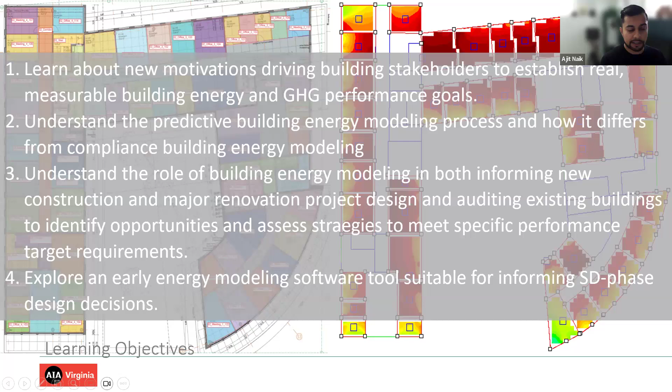We're going to today talk about energy modeling deciphered for architects, along with the virtual workshop. I have a few learning objectives that I'm hoping you'll understand: some of the motivations, especially with real energy and greenhouse gas performance goals that are starting to influence building projects; understanding the energy modeling process, and specifically the two different cases of when you actually want to predict your building's energy usage versus get it rated for a compliance process like permit or LEED; and understanding the role energy modeling can play in both new construction and major renovation projects.

And then finally, explore a tool. For those of you who attended the first week session, some of this may sound familiar, but I think it bears worth repeating for those who haven't.

Many of you may have seen this statistic, published also through the AIA, where buildings today globally account for more than 35% of global emissions. Now this figure fluctuates year to year, but it's always over 30%, sometimes over 40%.

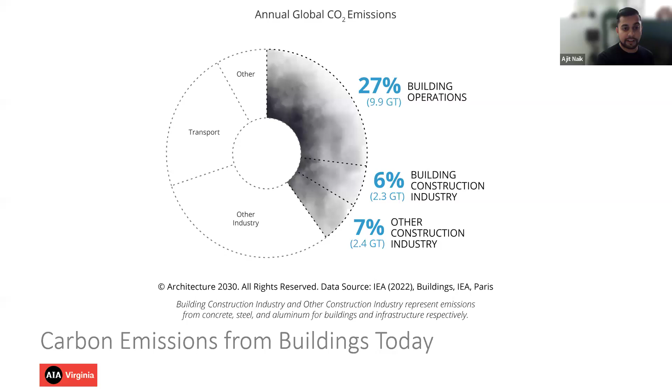So making a difference in building carbon emissions is one of the easiest ways to minimize our environmental impact. And people know this, right? So we've actually become more efficient with time. This is a plot from the U.S. government showing energy intensity by fuels in commercial buildings specifically, normalized by area.

We can see that for gas and electricity combined, from 1979 all the way down to today, we've gone from an average of about 118 down to maybe about 70. That's a fairly sizable chunk. We reduced our energy usage of buildings, all buildings, totally by almost close to 50%. So it's had an impact.

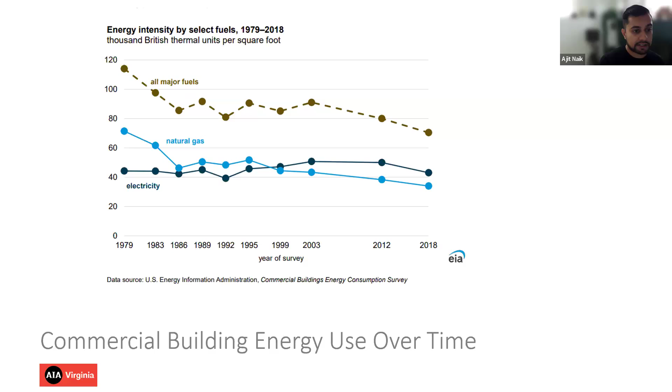And we see this, right? If we look at total US energy consumption, everything, buildings, cars, transit, factories, all in, we can really see that since the 1970s we've kind of started to flatline a little bit.

That's when building energy efficiency improvement happened, we had the oil crisis in the late 70s. Things got very expensive. There was a major motivation to reduce our energy demand, so that consumers wouldn't be faced with high prices, and we could have a stable country, and so forth.

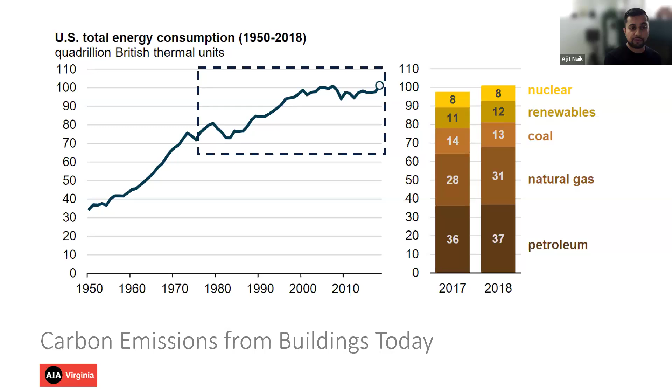So we really see that impact. The efforts in the 70s to improve energy usage and energy efficiency and minimize environmental impact have really paid off. And one of the ways that we did this specifically with buildings is building energy codes, one of my favorite subjects, a pretty dry topic, but one that I'm fascinated with.

And we see that in real world building data. Buildings on average have reduced about 40% of their energy relative to 1979. Building energy codes really explain that, because new construction and major renovations have to comply with these standards, and they're a lot more stringent than what they were. So it's a good thing and an example of a success.

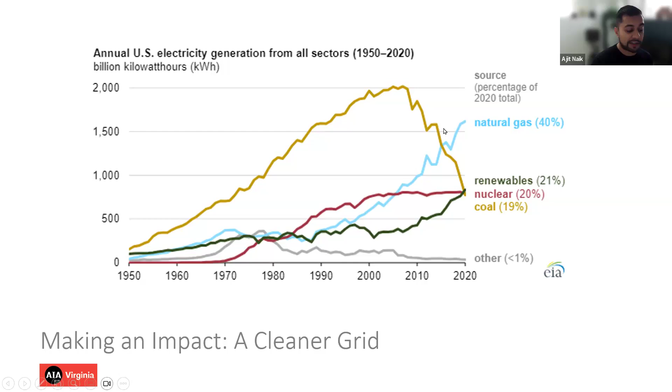But both of these things combined create the picture that we see in terms of forecasting carbon. So right around the same time as we made that switch away from coal towards natural gas and renewables started to ramp up, our carbon emissions have started to drop.

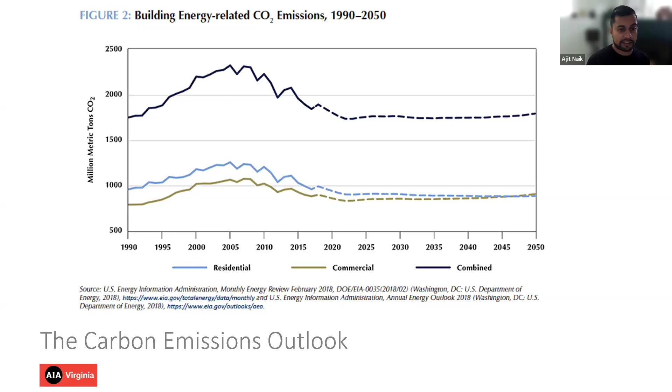But despite that, the EIA, which has access to all of the historical data and is plugged into future trends in policy, despite these increasingly efficient energy codes and our increasingly clean grid, we see that our carbon emissions actually start to flatline. We're dropping, but over the next 20, 30 years we kind of stay static. And again, these are building related energy carbon dioxide emissions. And why is that?

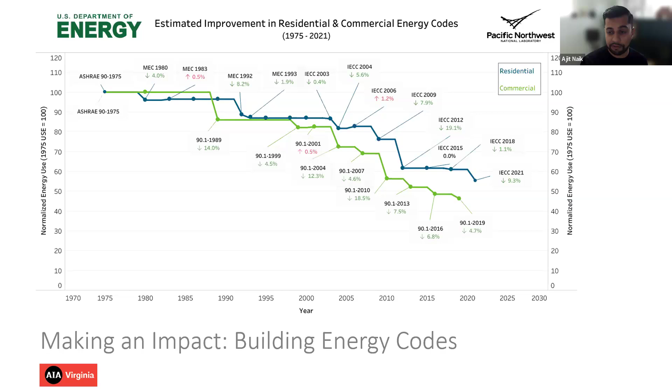Only 20% better than when we started out in 1975, not all the way to 55% better than we are now. So really, most of these buildings were built in a time before we had serious energy codes, or before a time we had energy codes at all.

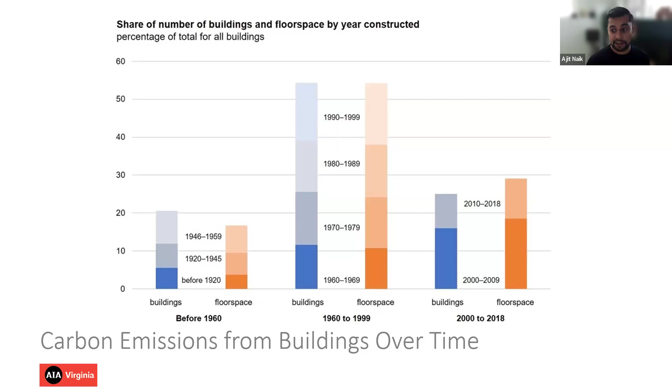And many of these buildings may not have been renovated. They may not actually be subject to any of these codes. The most recent estimate I could find is that by 2040, two-thirds of the global building stock will still be existing buildings, not captured by these increasingly modern energy codes.

So what do we do about it? One way that municipalities have responded to this crisis of carbon emissions from existing buildings is benchmarking ordinances. They exist in cities all over the country. Many cities, mayors, and governors have signed President Biden's building performance standard pledge, which involves benchmarking buildings.

So this is something we see increasing. I believe DC has been doing this since 2013, if I recall correctly. There's an increasing number of buildings each year covered by this. At the outset, it was only 50,000 square foot buildings and higher, but as time advances, next year it's going to be buildings as small as 10,000 square feet that have to report their energy usage and have it verified by a third party.

Making people pay attention and report this, and making that data publicly available so people can see where they stand — that's one of the first ways you motivate existing building owners to improve. Some of you may have a utility company that sends a report comparing your home energy performance to your neighbor's. Mine does, and when I'm double the amount of my neighbors, I'm wondering what's happening. So that's the first step to addressing existing buildings.

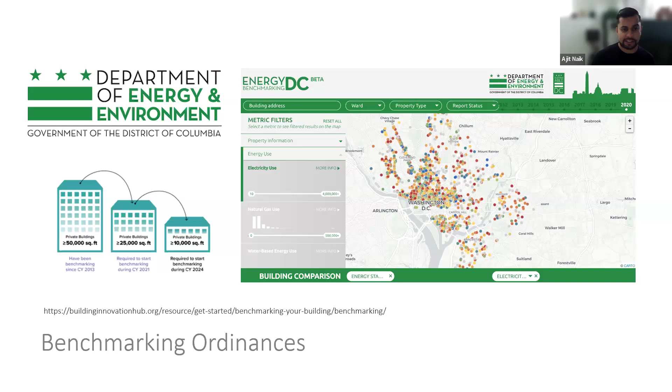Next, there's also a stick. Some municipalities, for example my home, Chicago, where I'm calling from right now, give you an energy rating. So does New York — it looks just like the ones given to restaurants in New York. Based on the energy performance you report each year and how you stack up with your peers in your municipality, they give you a sticker you have to post in the front of your building, and you're kind of named and shamed. There are many shameless people out there, building owners included.

Some municipalities are going even further, to put up a building performance standard. A building performance standard is a type of law built on benchmarking — when you report your energy usage, not only do you get named and shamed, but if you're below average, you actually get a fine. So if all the office buildings in DC are operating at a certain energy usage intensity and you're using more than that, you face a fine, and it can be pretty significant, on a rolling basis.

Let's look at what some of those standards are. In DC, for an office building, you have to be, on average nationwide, more efficient than 71% of peer facilities. So in DC the average office building is already better than 71% of offices nationwide. To be in compliance with BEPS, you have to be even better than that — in the 72nd percentile or higher.

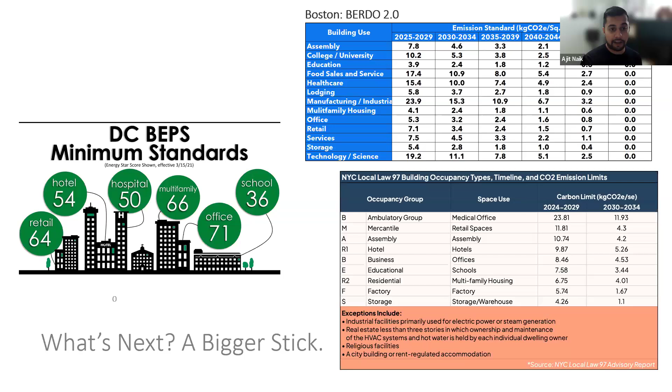What are these penalties? They're quite significant — sorry, the screen is a little small — but in Boston we're hitting fines of up to $400,000 by 2050. In DC right now, the first round of penalties is dropping next year, at $10 a square foot, capped at $7.5 million as a maximum fine. Those repeat every 5 years for buildings that continue to not be in compliance.

I couldn't find a clean summary of New York's fine structure, though I did find this news article describing the potential fines faced by Trump-owned properties.

These fines are all in the hundreds of thousands of dollars. They make a real difference as to whether or not you even retain a building if you can't afford to renovate it. These standards aren't everywhere, but they are in large jurisdictions around the country. Washington State has one, and quixotically, St. Louis has one. We anticipate seeing these grow more and more, impacting projects that all of us work on. So you need to deal with the energy code to get a permit or certification, and you really are going to need to deal with your actual energy performance post occupancy, or you're going to start facing these fines in higher tier markets.

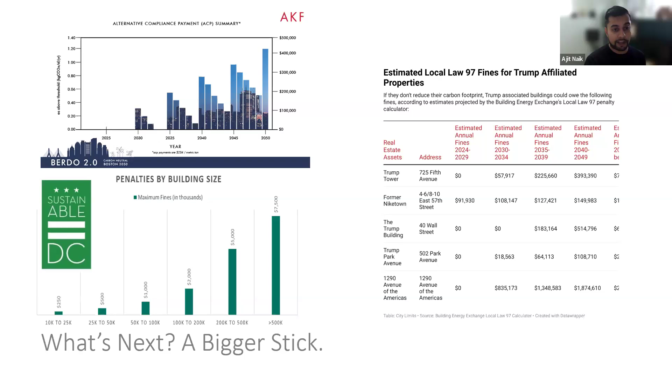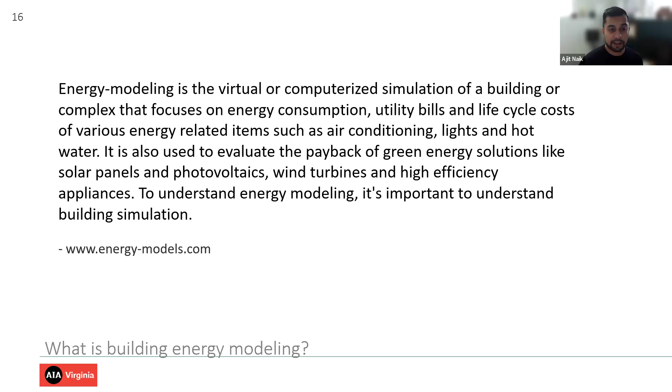So what do we do about it? This is where energy modeling comes in. Energy modeling, for those who are unaware, is basically a computer simulation focused on predicting how much energy your building uses. It's a type of building simulation. Building performance simulation is that writ large, using a computer-based model to predict anything about a building, as long as that model is based in fundamental physics principles.

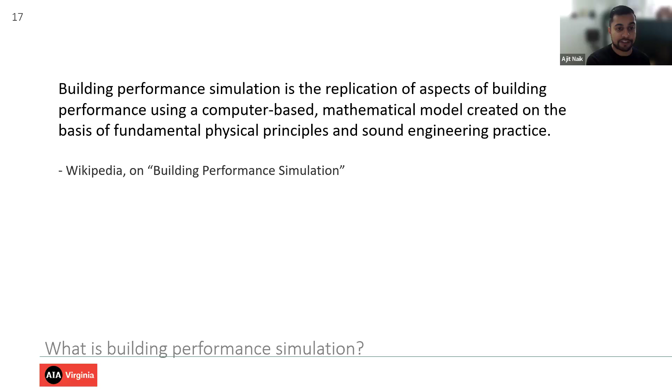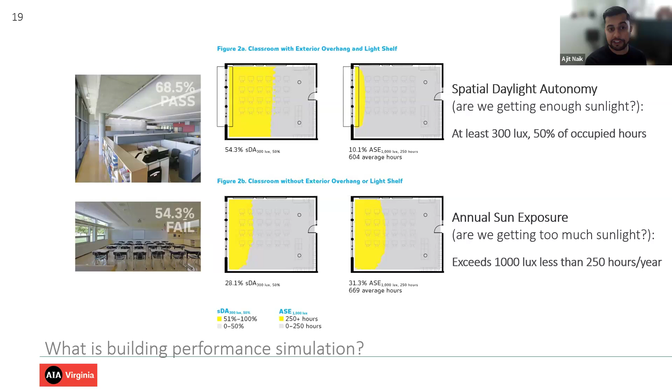There's lots of different kinds of building performance simulation, and all of them are intended to provide feedback and influence design. Some of you may be familiar with renders and daylight visualizations, quantifying how much usable light you have within a space and selecting finishes and openings to optimize that daylight. There's also embodied carbon analyses, where you can plug into a Revit model and compute how much embodied carbon went into your construction materials. There's also CFD, computational fluid dynamics, airflow modeling, where you can predict the pattern of airflows throughout a space for mechanical ventilation, or optimizing your facade for natural ventilation.

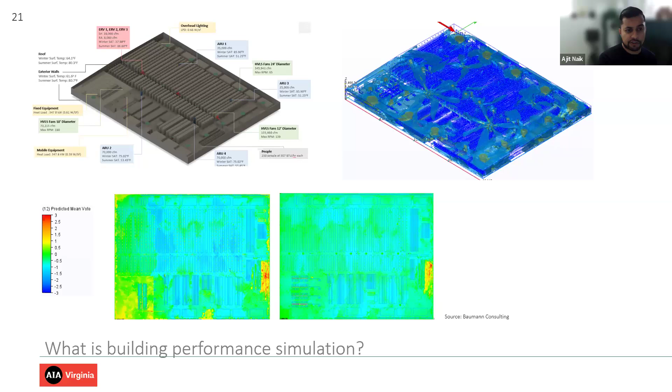So energy modeling is just one of a whole suite of building performance simulation techniques, and they all feed into each other. If you do a daylight analysis that optimizes your windows to minimize the amount of light you're using, or if you use a CFD analysis to optimize your natural ventilation so you can turn off the HVAC system more often, all of those things get accounted for in your energy model.

So an energy model at its base is you draw the building, define it. It's usually not quite as good looking as it is in your render. It's usually simplified, a little bit ugly, but representative of the building for the purposes of modeling fidelity. You define inputs like weather, typically using a 30-year average weather data to get a representative condition. You define the enclosure in terms of thermal properties, the occupancy, how often they're in there, the plugged-in appliances, the lighting power, the HVAC, the water heating, even down to the utility rates.

Basically, you can think about the energy model as somebody building a virtual copy of what's shown on your plans and your design. And you get a lot of useful things out of the energy model. You get your energy use, your peak energy loads, like how much rate of electricity you demand at the peak of summer. You get your utility cost. You also get carbon emissions out of here. Plenty of very, very useful design feedback.

So really, anytime you're working on a set from concept to SD and onwards, and you're sending something out for a cost estimate, if you're not also getting feedback from your energy consultant and there are energy goals on the project, that's a red flag. It's just as important when you send the check set to the cost estimator that you send that information to the energy consultant so they can provide all this valuable feedback. And you understand what kind of impact on your energy performance, your carbon emissions, your project goals, potential future penalties you really are incurring by selecting that VE option after all.

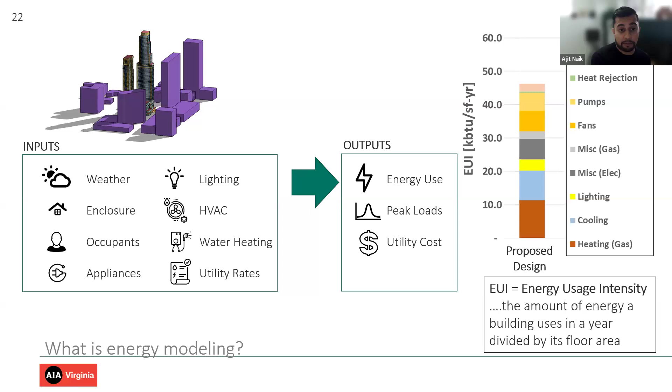If I have a medium office and another office 50% larger, it's not super useful to compare their energy usage directly. But if I divide it by floor area, I get a good idea of which one is using more on a per square foot basis. Just like we measure construction costs in dollars per square foot, we measure energy use in energy use per square foot.

Where is building energy modeling most often required? Where we started today, energy codes, right? Energy codes are a big one.

For those who have worked on a Virginia DEB project, you know you have to document compliance with the 2021 VECC. If you're working in Arlington County on a private development seeking a FAR bonus or density increase, you have to comply with Administrative Regulation 4.1, which explicitly requires you to run an early phase energy model and show how you incorporated it. So that's the first step, to get permission.

Regulations require energy modeling. Where else? LEED. I'm sure a few folks here have worked on LEED projects, whether new construction or existing buildings, and most LEED projects require an energy model as well. Not all—there's definitely ways around it—but most LEED projects, especially new construction and major renovations outside of tenant fit-outs, require an energy model.

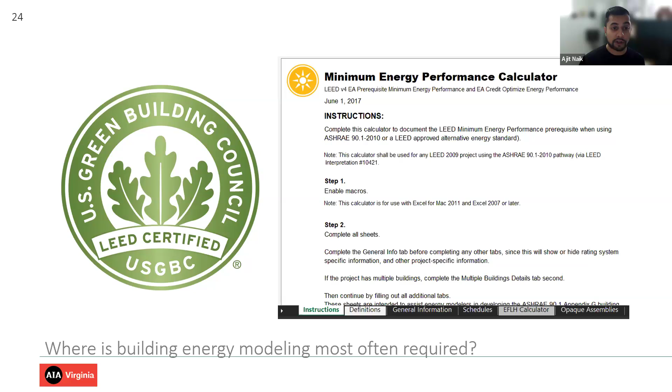That's also true of other certification programs—Green Globes, Energy Star, multifamily new construction high rise, which is required for Virginia Housing Authority projects. All of them require some kind of energy model.

The third main reason is incentives, right? There's specifically an incentive called Section 179D of the US Federal Tax Code. That allows you to get a tax deduction for designing efficient new construction or renovating existing buildings with efficient technologies. If you comply with prevailing wage requirements, it's over $5 a square foot you can claim. So if you don't, you're just leaving money on the table.

It's important to note that even nonprofits and governments that can't claim tax deductions because they're non-taxable entities can still benefit by passing through the tax deduction to the design team. So if you're an architect working on a federal project, it's always a good question to ask: can we take advantage of this, especially if you're already doing an energy model?

So those are really the three main reasons, motivators for energy modeling. There's regulations to get a permit or zoning approval. There's certifications, third party, which maybe you just want, or maybe they're required as part of that zoning approval. And lastly, there's incentives. There's many other reasons to energy model, but compliance is what all of those things share in common.

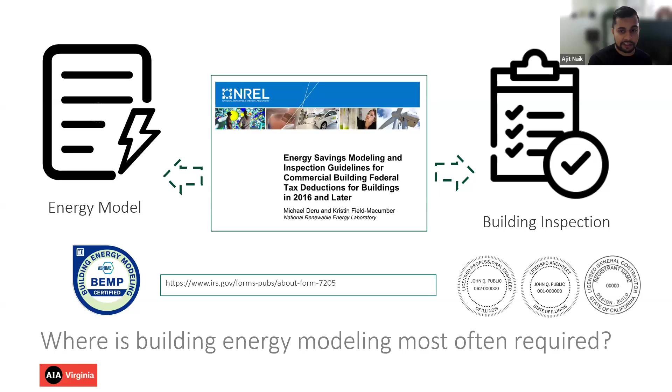Funny enough, the way compliance modeling works is you actually create two building models. You create a model of your building, exactly as you're designing it at that point. And you create a second model of an imaginary, fictitious baseline building. It's shaped like yours, zoned like yours, has the same program as yours, but everything else about it is code minimum—code minimum efficiency HVAC equipment, code minimum efficiency lighting, code minimum envelope, all that jazz. You just have to prove that your model beats that imaginary fictive baseline.

None of these things—the incentive programs, LEED, energy code—are based on accurately predicting how much energy you use, but on making sure you beat this reference baseline building. It's all relative. Sounds kind of shocking, right? Shouldn't energy modeling be about accurately predicting your building energy usage? But no, it makes sense if you think about it.

It's really similar to the EPA rating cars' mileage efficiency, which also started in the 70s. All cars, when you go to the dealer, get that little sticker that says 28 mpg, city 32 highway, whatever it is. I have been driving since I was 16, and I have never once in my life gotten the mileage shown on the vehicle, because I've got a lead foot, I live in a cold climate, there's many factors that lead to that.

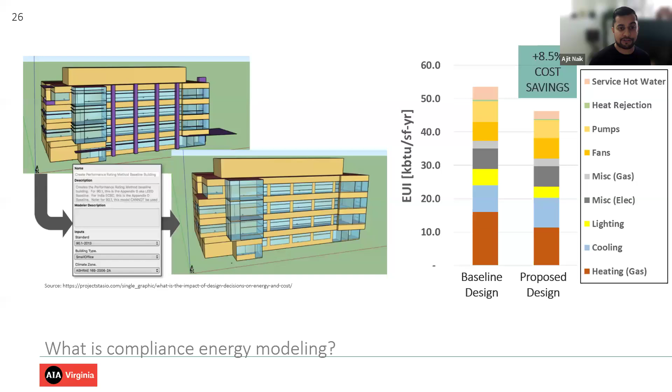It's really about performance rating.

This differs from performance modeling. Let's say you own a building in DC, you're subject to BEPS, and you just realize you've got a $3 million fine coming up. And that's based on your utility bills. That's not based on any kind of fictional baseline building relative performance. It's based on your utility bills.

So this is where performance modeling comes in. It's a form of modeling, same type of build, you build the same building energy model, but you're intending to use it to actually predict real world building use. So you need to do a much better job defining all of your simulation inputs, making sure they use real world aspects of the building.

A really good example is schools. When you're energy modeling a school, it'll use a stock default school schedule in the software. But it's always worth going and looking at the academic calendar of your school district, understanding when the holidays are, when spring break is, when summer break is. That information is usually available to you.

And while you might not need that for a compliance project, where you're just comparing to your baseline, it may not be required, but it definitely is required if you're trying to accurately predict how much energy your building is going to use. There will always be things that are uncertain.

Like, keeping with schools as an example, for new schools - maybe university is a better idea - sometimes there's staged occupancy, where only some of the faculty move in, labs take a couple of years to move in. We're not sure how that's going to look.

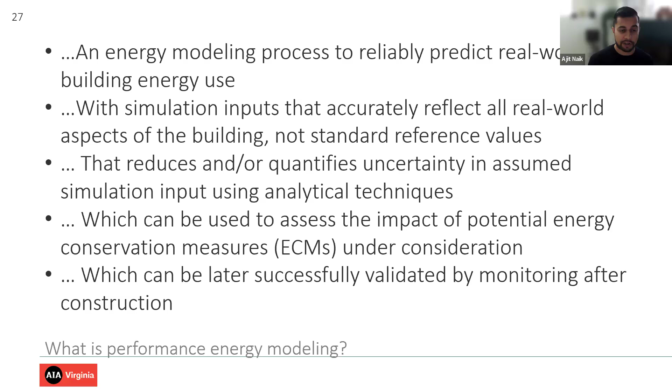You need this kind of predictive performance model that isn't just about compliance. So you can't always just look at your LEED energy model or your permit energy model and say, oh, that's how much energy we're going to use. It really doesn't work like that. You need to use performance modeling for that.

Just a quick summary: compliance is again just about comparing and rating you compared to a typical building. Whereas performance modeling is really about trying to make sure you have a specific outcome.

So if a client is a university who's going to set a utility budget based on your energy model, or the client is a building owner in a place with a building performance standard that's really worried about fines, or somebody's trying to design a net zero building that has to use zero energy when you include the renewable energy on the roof - all these cases, wherever you have a measurable specific energy or carbon performance goal, those are always signs that you need to do a bit of a heavier lift.

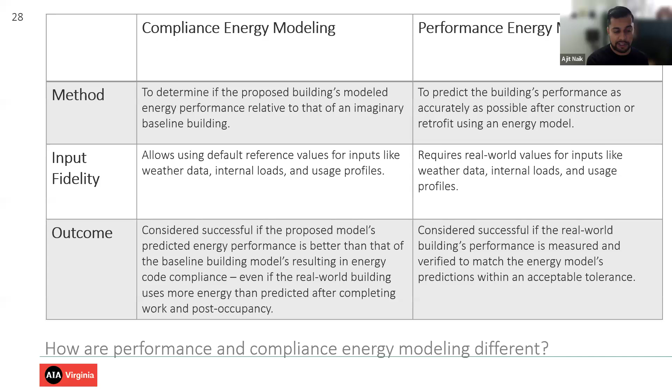So I want to talk briefly on two scenarios, how this can help existing building owners. The easiest way is existing buildings have the value of having real data. Everybody has utility bills if you're operating a building, and it's really helpful because you can then calibrate your model to the utility bills.

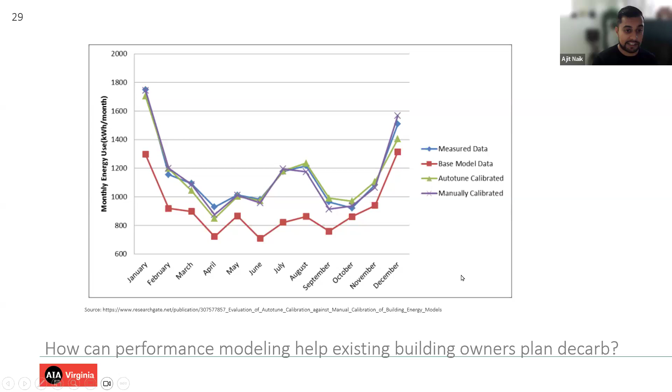You do the best job you can, and maybe you're a little bit off, as shown in this first kind of step here. But with some effort and tweaking of your inputs, getting back out to the building, maybe refining some things that you missed, you're able to get a much better match. And once you calibrate an energy model to existing data, it's really, really useful for making decisions.

What about building developers? A lot of us work in new construction, me too, and a lot of those, we don't have those options. There's no existing building to double check, there are no utility bills to calibrate against. There's only the things that we know are going to go in the design, and the things that we're uncertain about, like the weather or occupancy. And those things impact design decisions differently.

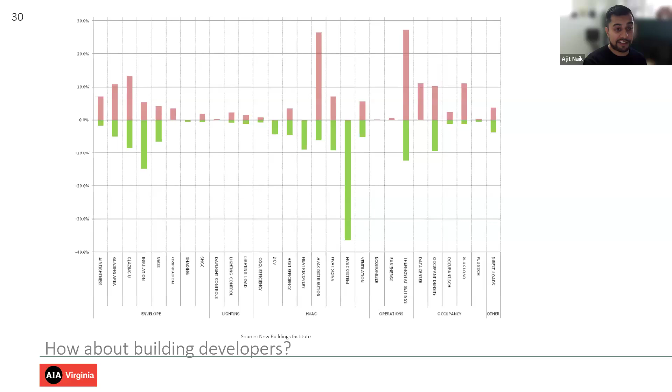It's pretty easy to add a floor to a community center in early concept design, but try telling the PM that at 50% CD—like that's not even the same project anymore. So it's really useful to energy model early so that at the same point as you're evaluating early design decisions based on preliminary cost estimates, you also understand what they're doing to your energy performance.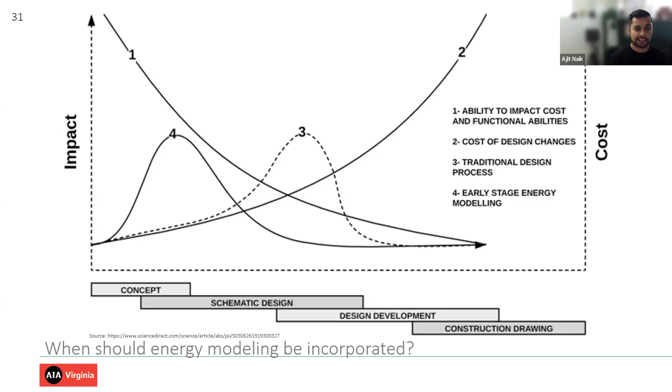And not just what you need for permit, not just what you need for a certification, but maybe also what you need for incentives. And if you're working in a jurisdiction with a benchmarking regulation, maybe even in terms of how you perform relative to the existing building stock. By the time you get construction drawings, it's very difficult to course correct and change things—at that point you're really just using energy modeling to validate the decisions you made earlier on.

This is an example we worked on in Virginia, the Brock Environmental Center, about 12 years ago. I mentioned this project on the first workshop, but I wanted to share some slides. This is a really high performance building in Virginia Beach, small, an environmental center. If some of you may have visited it, if not, it's a beautiful facility and site—I highly recommend you check it out next time you're in the Bay. It has the whole gamut of sustainable design features: great envelope, on-site renewables, high efficiency, everything.

But still, energy modeling was essential here, for cost savings. Everybody knew at the outset this building was going to be designed to be net zero, and that we had to pull out all the stops to make it happen. So one way or the other, it was going to happen, but that doesn't mean all of those things cost the same. Since we knew we had to get to net zero, photovoltaics were going to be necessary.

You can't use no energy at all—you minimize it as much as you can and then make up the rest with solar or wind or what have you. So if it's a sunk cost that you're going to have to buy solar anyway, you might as well start thinking about, well, what if I buy more efficient building components?

Is the delta between picking what I was going to and getting that slightly more efficient system, how does that trade off against photovoltaics? As we all know, things like wall thickness, roof thickness, impact program area, impact structural requirements. So a lot of this stuff needs to get sorted out fairly early in design.

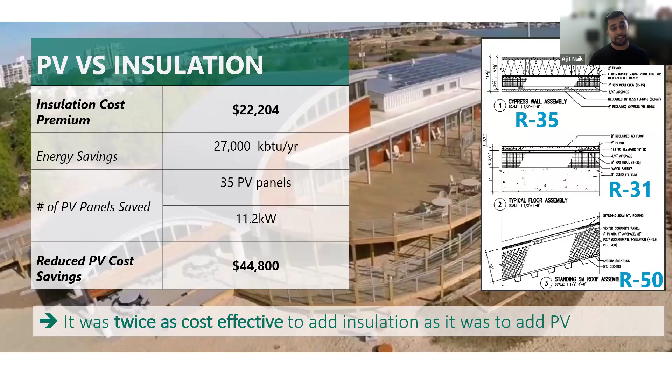Roof insulation was a great example. We noted that for this small building, using 2013 pre-COVID pricing, adding just a couple more inches of insulation added $22,000 to the building costs. Photovoltaics were also more expensive at the time, but that insulation savings was equivalent to the production from 35 PV panels, costing $44K. So it was actually twice as expensive to implement photovoltaics as it was to do insulation.

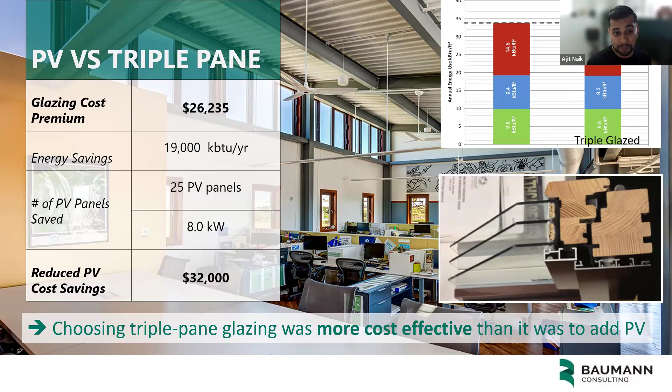Same thing with the glazing, triple pane glazing. It wasn't quite as dramatic, but it was still cheaper to bump up from double to triple pane glazing than to buy that same amount of generation in photovoltaics. So the decision to include triple pane or add 3 inches of insulation to your roof, that's only something that can really happen early in design. I've never seen a change like that happen in CD, not even really in DD, maybe early DD, but it doesn't happen too often.

So energy modeling is a great tool, a necessary tool, important, especially to use it early. This is where you all come in as architects, whether you're doing this in-house, which can be possible, or whether you work with a consultant. It's really critical on any project that has energy-related goals.

There are several references you can use. There's lots of ASHRAE standards. AIA put out a standard called Integrating Energy Modeling into the Design Process. Rocky Mountain Institute has a good one. There's some forums on Unmet Hours, energymodels.com, which are great resources for the community to come and answer questions that they might have.

If you're looking for a good energy consultant, a good energy consultant is somebody who knows the project details, answers hard questions, knows the codes and the rating systems, works quickly, knows the software, meets quality requirements, communicates, and you just feel like you trust them.

Somebody who's really good understands the bigger picture, not just focused on energy, but understands the entire design and construction process. They ask the questions, they're a bit of a troublemaker, they suggest things that you might have to react to. They're an active part of the team, actually at the design meetings, not somebody who you email and hear back from 4 weeks later.

They have proficiency with multiple tools and can select the right tool for the job. They understand what level of accuracy is required at what phase. When something is just a sketch on paper, many things are unknown, so you don't need to develop the same amount of time, effort, and complexity as you do later in design. And they really kind of inspire the team to be better.

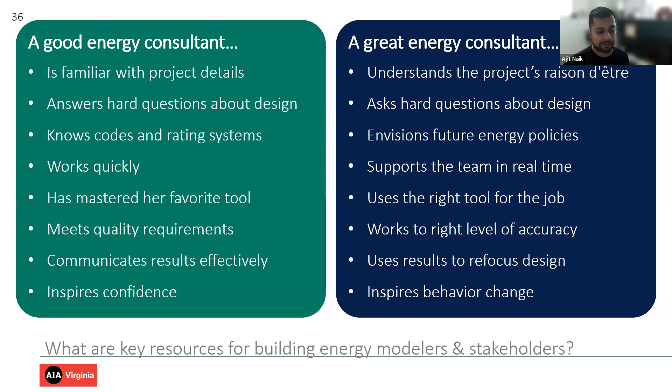Again, there are lots of tools out there. IBPSA, the International Building Performance Simulation Association, publishes a database of tools available, and there's many, many of them. I'd just like to point out Energy Plus is a really common one, developed by the United States DOE. It's like a text-based DOS type engine, but it's a back-end thing that people build lots of front ends for, like Open Studio, Design Builder, and the US government has its own free tools. They all kind of run this in the back end.

eQuest is another common engine that's used in the same way and is running in the back of the software we'll explore today.

Coming back to early phase opportunity, the software we're going to use is called Sketchbox. I dropped the link in the chat, so please make sure to register for an account if you'd like to follow along. It was developed by a company called Slipstream. The gentleman, Ben Heymer, runs the software development team over there. They are a big engineering company, like Resource Innovations or Willdan, that runs utility incentive programs, and they run a utility incentive program here in Illinois for energy efficiency.

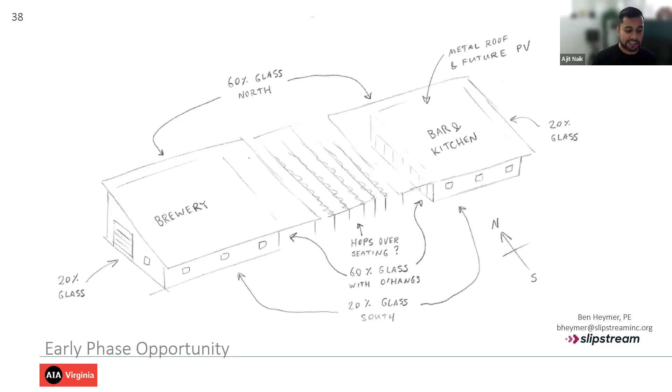They noted that a lot of these decisions that make an impact have to be decided in the early stage, when you're still kind of in a hand sketch, and just created a program to incentivize it. So I really was looking for the early phase opportunity. These big, detailed, complex models that people build for LEED can take hundreds of hours.

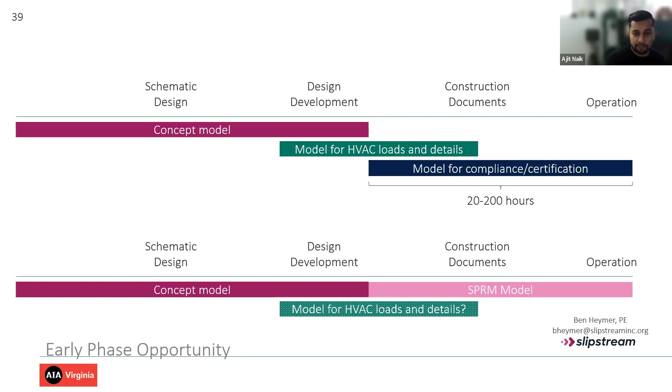The opportunity all lies in here. So you really need a tool for that concept and planning phase, and you need something that's simple, easy to use, provides fast feedback, allows you to test lots of options, many different changes, and work quickly.

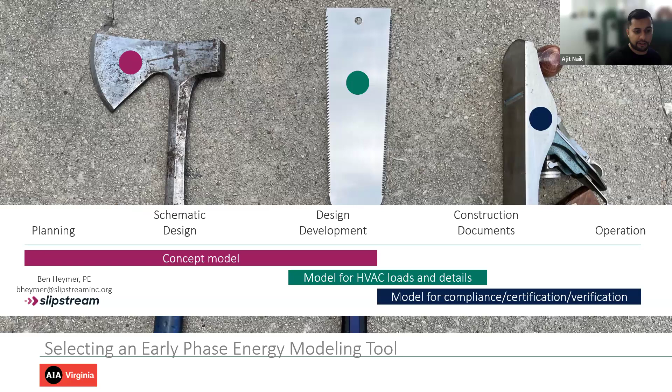Sketchbox is certainly not the only tool out there. Some of you may be familiar with Cove tool, which was discussed at the last session, or Sefaira, or Climate Consultant for the old heads out there. There are many different front ends for the newer folks, like Ladybug tools on Rhino. There are lots of different tools out there specifically designed for early phase analysis, and this is just one of them. So if you haven't already, please go ahead and hit that login page at the bottom, sketchbox.io, and create an account, and we'll be going through there today.

One of the reasons I selected this, and not because I know Ben, but because it's very accessible. Lots of times, early energy modeling software is kept behind high pricing, and one thing I like about Sketchbox is it's really cheap. There is a basic model, which we'll use today, which is pretty limited in terms of your geometry, but the standard fee is only $149 a year. So I think it's not too expensive, relatively speaking.

So we'll distribute the slides after this again, and we have a little bit more content after this slide, providing some guidance, but we'll actually walk through a demo right now. Before I get started on that, I wanted to pause and see if there were any questions that have come through on the QA.

We did have one. This is from an anonymous person inquiring about the pricing in PV, which has come down significantly since the Brock Center project. With that math, is that still applicable to today's economy? I really doubt that ratio is the same, right? This was done in 2013 when there was still the business energy investment tax credit for solar, and that calculation doesn't include that since you don't get it till after construction. It might not be the same amount of insulation, it might not be the same amount of PV, but the point is you have to do the assessment, right? That'll vary project site to project site.

So once you define your location, your costs, your specific operating conditions, you get to design your building. You'll start out with just a square.

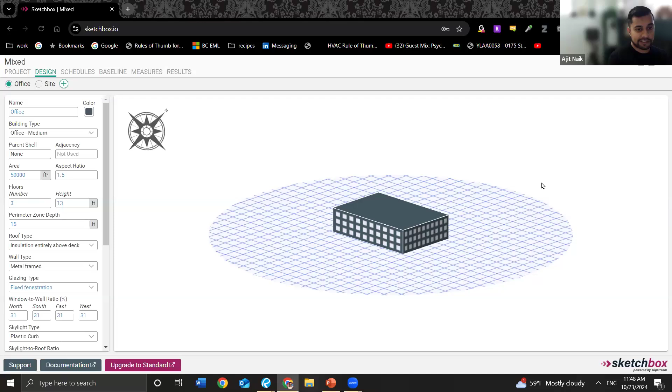One of the limitations with Sketchbox, and generally with early energy modeling software in different ways, is representation of the building. Cove tool, you put in a Revit model and it just calculates your area and doesn't really use the building geometry. Sketchbox does let you use building geometry, but limits you to how you create it. You can only create shapes of typical sizes.

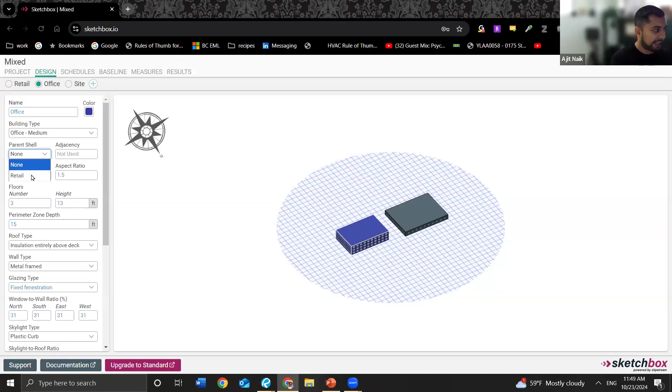So if we look, you can add another shell. Let's just say our first floor is going to be retail, like a non-mall setting, as the first floor. We can add another shell to it. It'll create another box. We can select the retail as the parent shell. We'll say that it's going to be on top of it.

We're going to say that it's 8 floors, and it's 50,000 square foot. Let's make it a little bit bigger so it has a better aspect ratio. Let's call it 100,000 square foot. And it gives you a fair approximation of the building.

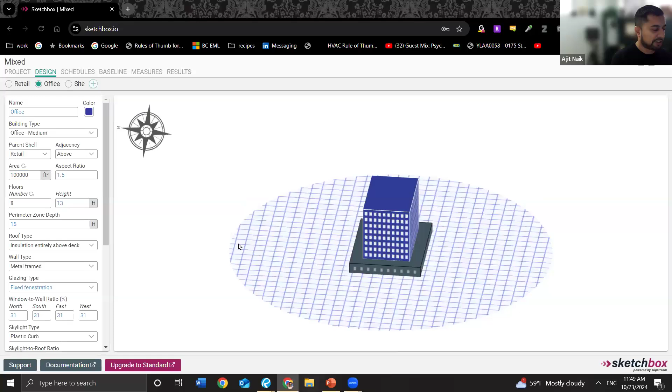So if you have a curved building, or an L-shaped building, or anything else, you can try to approximate it using these basic block shapes and the adjacency. So if it was maybe more of an L shape, I could have it based on the north. But let's go for now with assuming it's kind of a stacked mixed-use tower with street-level retail and office up above. So let's start with the office.

With the roof type, it's insulation above deck, typical metal deck with, say, polyiso up above it, typical steel frame construction. Fixed glazing, you can define different window to wall ratios. Let's say we're a little bit glassier here, going up to 40%. And it'll actually make that change directly in the software.

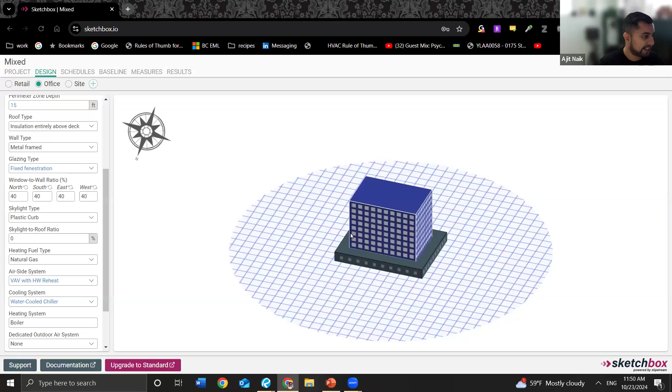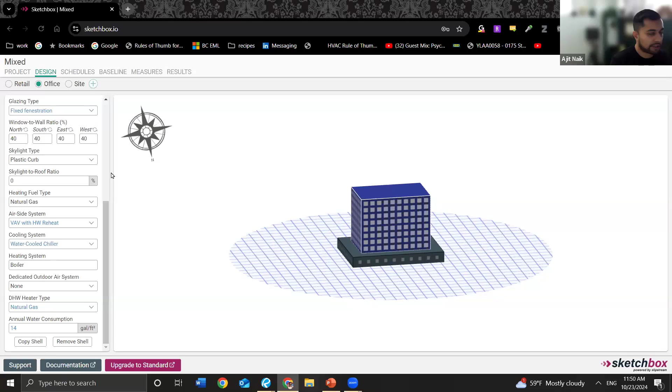And you'll see if we went down to like 10%, it makes those windows real small. So while it's not a beautiful representation, it's a reasonable one. You can define skylights. You can pick your fuel source, gas or electricity. You can pick different common HVAC system types that you see. And it gives you defaults for the service water consumption based on your building type. So pretty basic, but just defining your enclosure, your lighting, your building design.

Next, we proceed on to schedules. They actually have tons of default schedules here. So we're looking at the office, we can also do it for the retail. They each work separately. So it'll pull open a typical occupancy schedule.

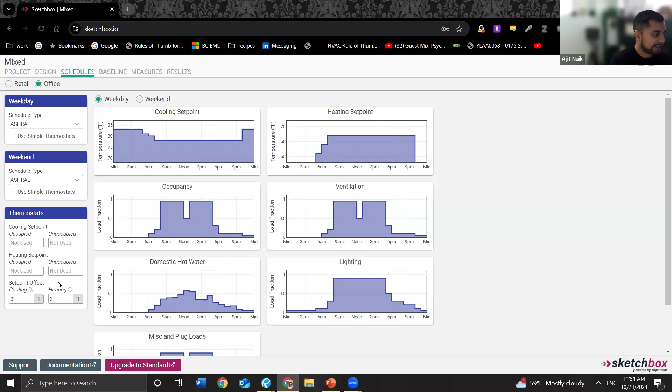Looks like it starts at 6 o'clock, most folks coming in at 9, kind of filtering out throughout the day. You can change these numbers too, you can actually modify these schedules. It's a little bit blocky the way to do it, but you can change your thermostat set points. Let's say people really like it cold, or they really like it warm. However it works, you can create these both occupied and unoccupied schedules, and it lets you define schedules for occupancy, ventilation, domestic hot water, lighting, all the things that use energy in your building.

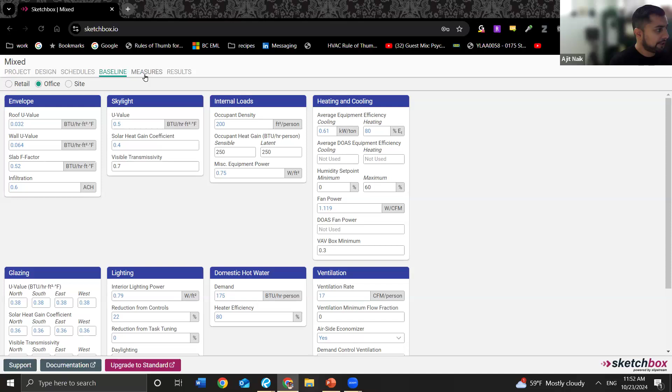So it gives you a summary of all those things, if you want to adjust them in more detail, you can define specific values here. But as stock, it'll just pull from the code minimum. So all these values here, the roof, the wall, the slab, are just taken from the code minimums.

Once you've defined your base design, usually for new construction you start with code, you can select different measures. You can add a measure and say, I'm going to check what happens if my glazing U value on the north, east, south, and west changes. Let's call it improved glazing.

Let's add the measure. So it creates a measure: no change, code minimum, and it defines better options, best options, and also allows you to put in custom values. A 0.3 U value is about the best double pane glazing you can get, so we'll test an option with this good glazing. Let's go see what happens.

So we come to results. This software runs on the back end on Amazon Cloud Services, so sometimes if you're the first person using it in the day, it takes a couple minutes to chug, but I ran it earlier so it shouldn't take too long. It'll take a few minutes to crunch both the baseline and the proposed case, and then provide us a bunch of results. While that's happening, let's give it a minute.

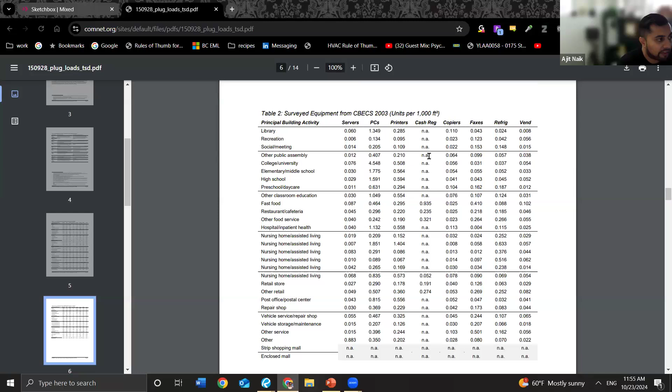Right, let's find it here. It has not only all these different categories of what types of equipment are in these spaces, but they actually have a power density, down here in table 4. So for different space types—office, laboratory, warehouse, food sales, public assembly—there are references showing the average amount of plugged-in equipment, the minimum surveyed, and the maximum, plus a weighted average as well.

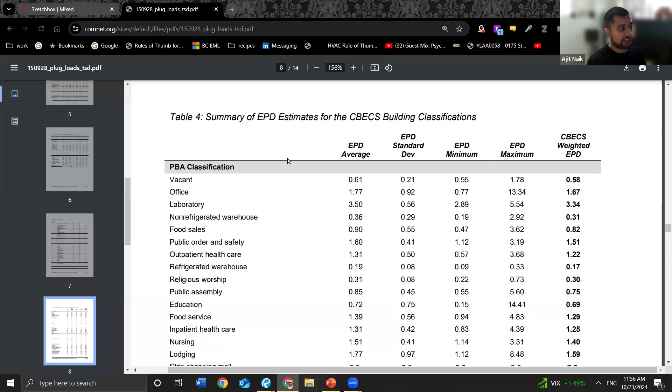So typically, sight unseen, early in the project, we're referencing standards like this. That's also what a tool like Sketchbox or Cove Tool would use as the default. If there are any high energy spaces, like a server room, commercial kitchen, or a call center, it's worth doing an actual equipment count—you can usually work with the electrical engineer since they'll need to provide power to all that stuff, so you'll find power requirements on the electrical schedules. But if it's too early for that, it's always worth using a resource like ComNet to estimate what's reasonable for your space type.

All right, great. And when we come back here, this is finally finished running, we get our results. So we have our baseline energy cost and our improved energy cost. Didn't make a huge impact here—it wasn't super sensitive, but it did save a little bit of money, mostly impacting heating. So if we look at heating, we went from $4,645 a year down to $3,920 a year.

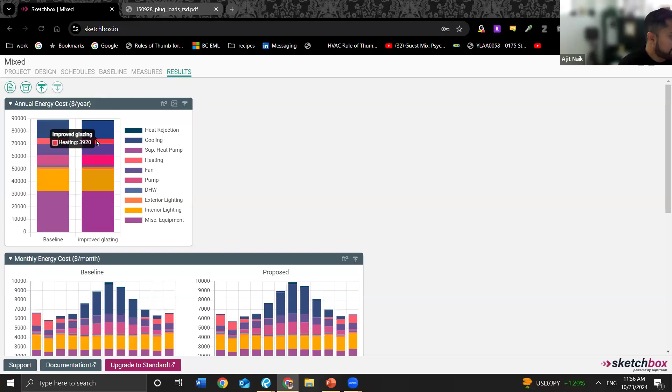So it's like $600 a year. Probably doesn't pay for the difference in windows, but you get lots of useful information. You get the monthly energy cost, the energy cost savings per year, a results table for each of your options, and a summary of your performance.

Coming back to the measures again, let's say we want to try a bunch of things. They have a handy set of typical measures you see: upgrade the roof insulation, upgrade the wall insulation, air sealing, improved glazing, improved SHGC, efficient lighting, efficient task lighting, this whole set of things based on the ASHRAE Advanced Energy Design Guide.

When you run it again, it'll show you how they all stack with each other. You'll note that on the measure side you can actually reorder these. If you air seal your building first, you're not going to get as big of a bang for your buck with an HVAC replacement. Perversely, you get more savings from a high efficiency furnace when you have a poorly air sealed building. But if you're designing an airtight building, it's important to order those things in how you're going to design or retrofit it.

So let's see how this guy was doing. 2 models remaining, all right, that's pretty good. We'll get an idea, and once you come up with the suite of things you're trying to evaluate, you actually see how much impact each one has.

Starting with the baseline, this shows that for this building, internally load dominated in a warmer climate, we're not getting a huge amount from the insulation side, but we are pretty sensitive to glazing SHGC. So selecting a lower SHGC glass is going to have a big benefit. Lighting also had a large benefit, and more efficient cooling equipment had a large benefit.

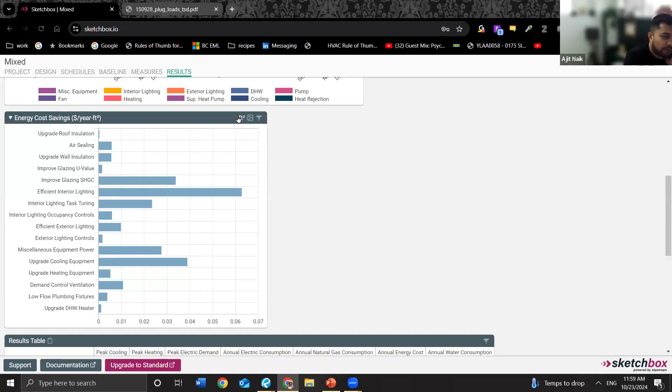Wherever there's a jump, you get these monthly energy costs for your base case as well as your optimized case, and an understanding of how much you save each year in dollars. You can always normalize it and look at dollars per square foot to get a total operational summary. You can copy this as a photo and save it down, and export the data right out of it.

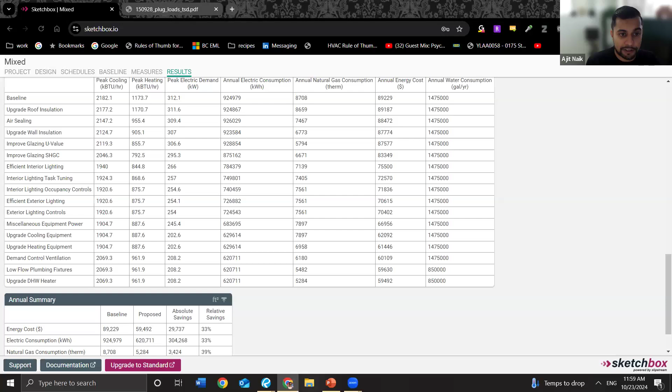But we really like to use tools like this at the design meeting. We get an early concept design, build a rough model of it, and we're like, what's on the table? Can we do new glass? What about more roof insulation? We're able to answer these questions really quickly.

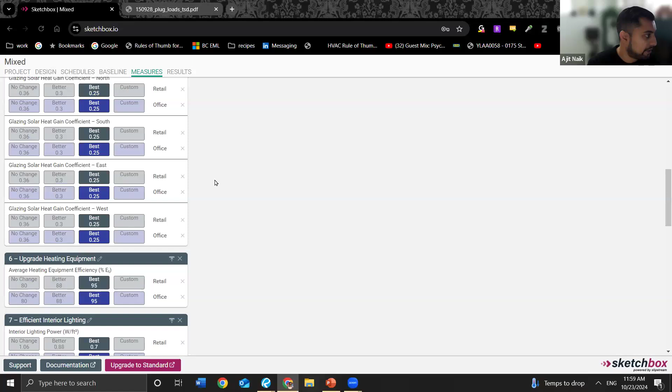Just as a final bit here, with the last minute remaining, let's give that example. Let's see what happens if we move the upgraded heating equipment to the top. I want you to drag these up. So we're going to put the heating measure up front, before all of the envelope measures.

We'll notice from this that there's going to be a larger savings due to the heating, because with the non-optimized envelope, if we put in a more efficient heating system, the heating load is more, and we do see that here. So upgrading the heating equipment was, I think, we have almost double. It still is a relatively minor impact, but especially when you're working with existing buildings, it's important to think about the order in which you do these things.

So I'll close there. Thank you all for your time.